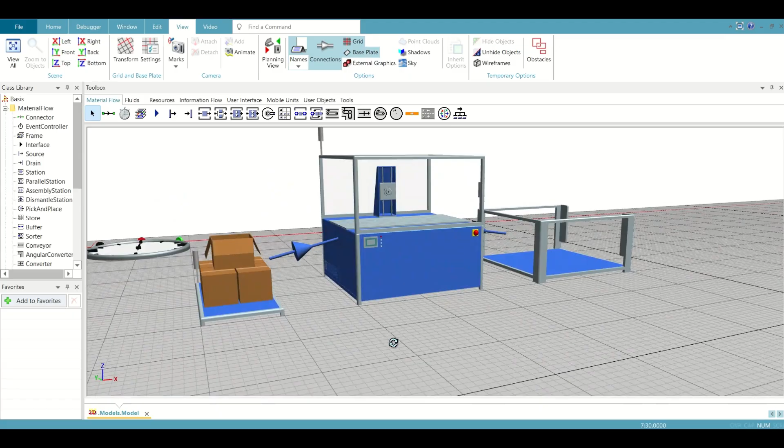And this is how our station, source, and buffer look in 3D. Now, if I just double click on this, you're going to get the properties window here. Let us keep this environment in 3D.

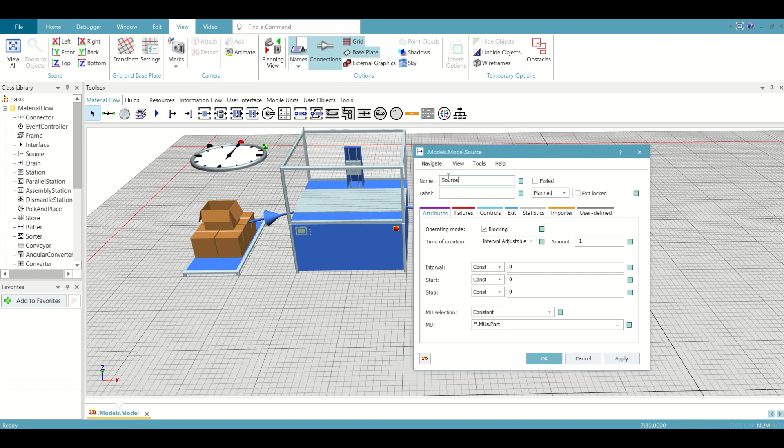Now let's look at the properties of the source. So just like here, we have the source which you can rename as per your requirement, and you are going to have all these details out here. We have a lot of variable parameters which you could feed into the source of this plant sim.

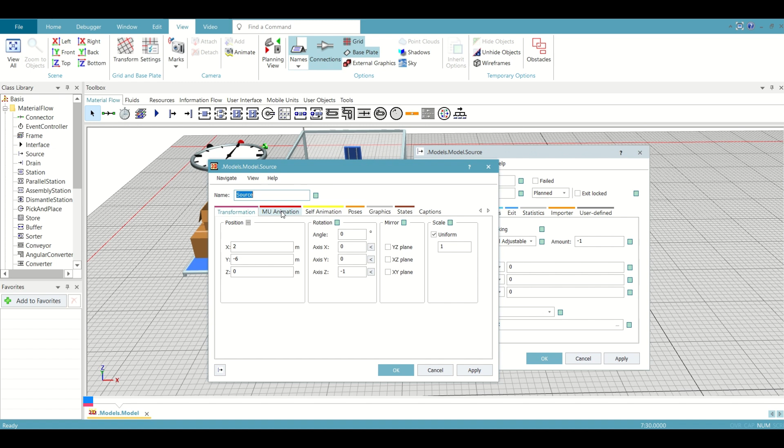Right now, if you click on this 3D, you are going to get the real 3D visualization related property window popping up, just like we had in Flexsim. In the single properties window of a source, you will be able to go into the visuals, generals, and stuff like that. Here you are going to have a separate property window for visuals where you can do transformations, MU animations, self animation, poses, graphics, states, and captions. So we'll look at all these in detail, guys, in all our tutorials coming ahead. We are going to have a long run together.

Now, when we look into the attributes, here you are going to have operating mode, time of creation which can be adjustable, delivery table, number of adjustables, triggers. Let us go with the interval adjustable. And what we're going to do is change the interval to, say, 10. Let us see what happens now.

And then we have a start time, we have a stop time also. You have an MU selection here, different selection criterias. Let us keep it constant, MUs.Part, okay? And what we are going to do, basically just like in Flexsim where we have a source where we put in the interval time, we are just going to put it in here.

Then we have failure modes here. We are not going to look at all these as of now, because that would be more detailed for us. We are just starting with basics, right? So let us just put in the timing for that, that is interval for the source, and then we can go ahead. But I will just take you through what are the different properties we have as of now.

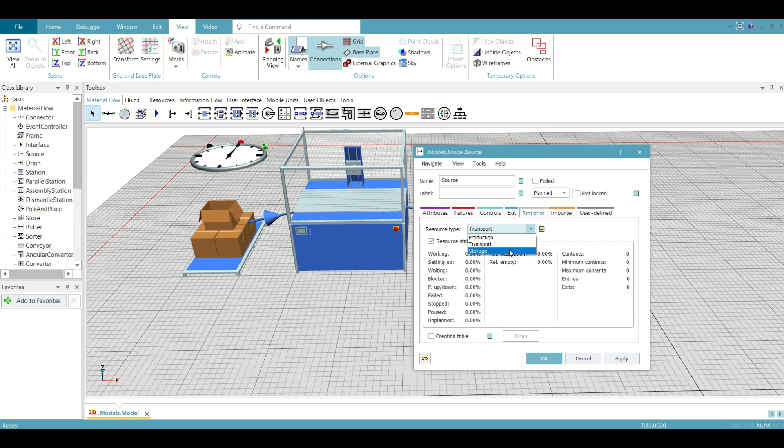Now let me make this okay. And what we're going to do now is open the station properties. By double clicking that, you are going to get this up, right? Here also you're going to have a processing time. Let us keep it what it was by default.

Just like in Flexsim, when you open it, you're going to have that 10 in the process time, right? That's what you also have in plant sim here, process time by default. Okay, you're going to keep it constant. You're going to have a lot of distributions here, guys, and we are going to learn all related to statistical distributions, because that is a must in simulation study.

Okay, and then if you look at it, we have a setup time, recovery time, then we also have a cycle time, which has a different tab here. And this is quite interesting, guys. In plant sim, you're going to have three times here: process time, setup time, recovery time. Whereas in Flexsim, you're going to have only two times, that is setup time and process time or cycle time, everything in the same thing.

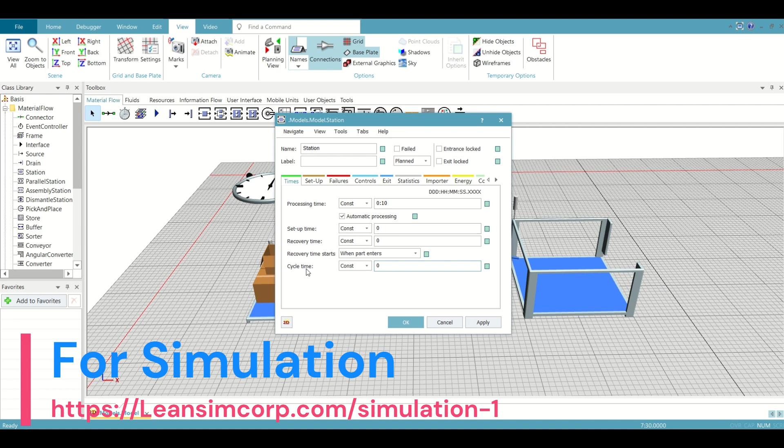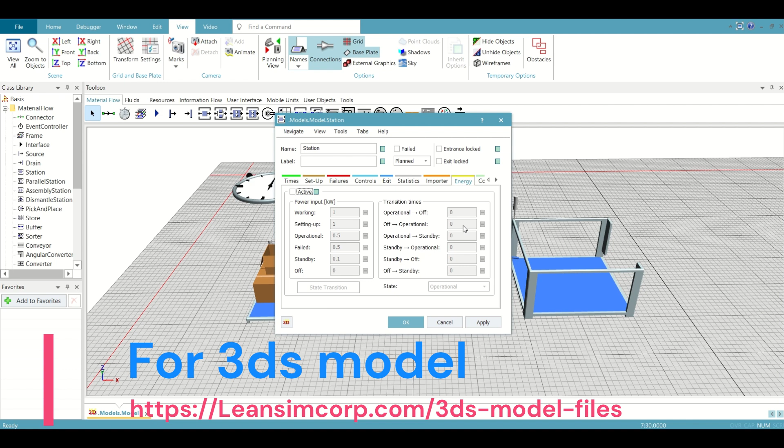You have a lot of distribution here, segregation, by the way. Then when we go to the setup, we have different types of strategies you can put in the setup. Failures, we have controls, exit, statistics, importer, you have an energy saving calculations, guys, in plant sim, and that is quite great stuff. For stations, we are going to feel very excited, and I am very much interested to use this feature and identify what things are going to be.

And then we go to the cost, right? And then we have a user defined thing. Let us see and explore what all these things mean, but let us stick to the basics as of now, and that is process time.

I have just put in the process time now. Let us go to the buffer. Here also we're going to keep the default buffer capacity.

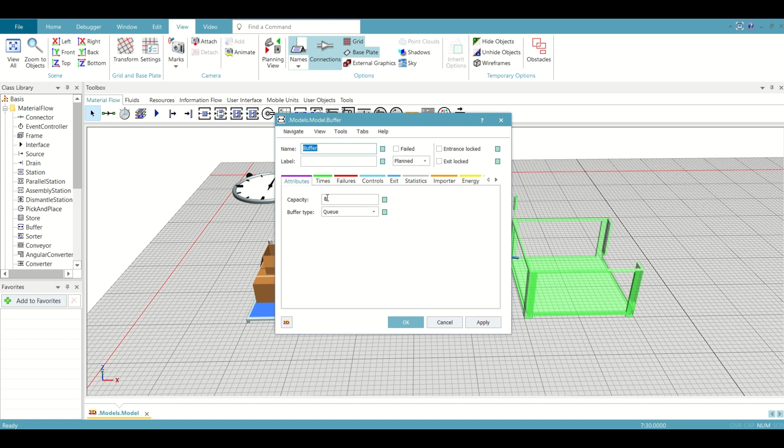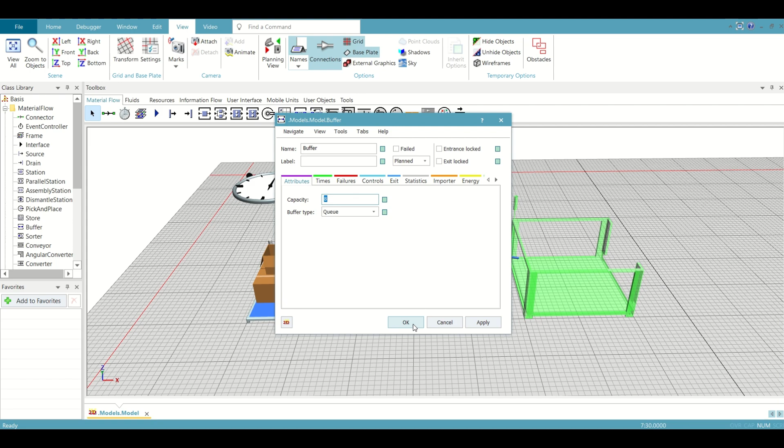Buffer related properties you can see here by double clicking this buffer. Here we have times, failures, controls, exit, statistics, importer, energy, and we have a cost associated here and the stuff. It is quite great because you get all the properties in the same particular attribute or object. So that is what I found great.

Now let us basically run this simulation model. We'll go in home, and in home you can see here event controllers, and when you play here you're going to get the different stuffs visualized. So just look at the part, guys. It's just like a die, you know.

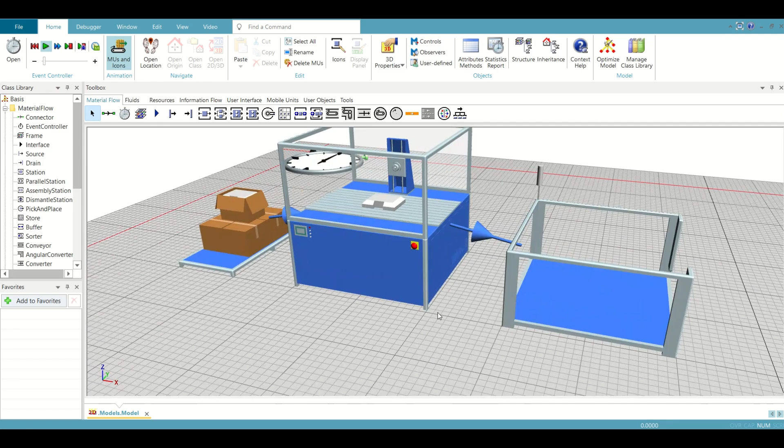This is a flow item which you had in Flexsim, a box which used to flow. Here you're going to have something just like a die. But in Flexsim the great thing is you can just move this out, you know. Yeah, here it's not possible to take it out. So this is what it is.

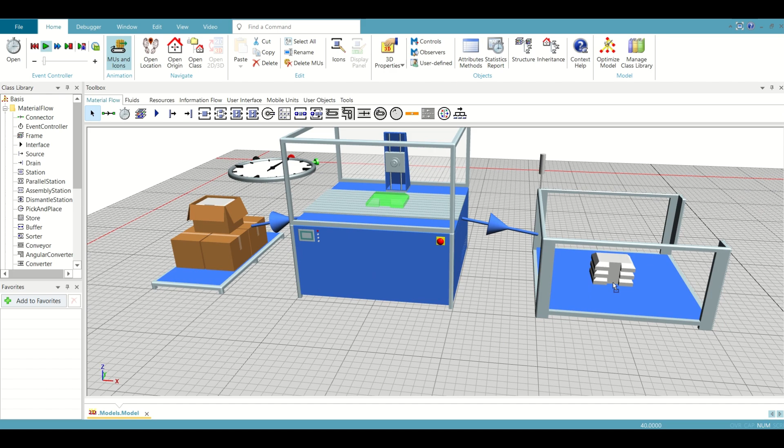This is how it looks, the 3D environment looks quite great, but not that great as it is in Flexsim, right? The 3D visualization, most probably it might be great. We can see ahead by putting or changing its graphics, but the initial one is quite simple.

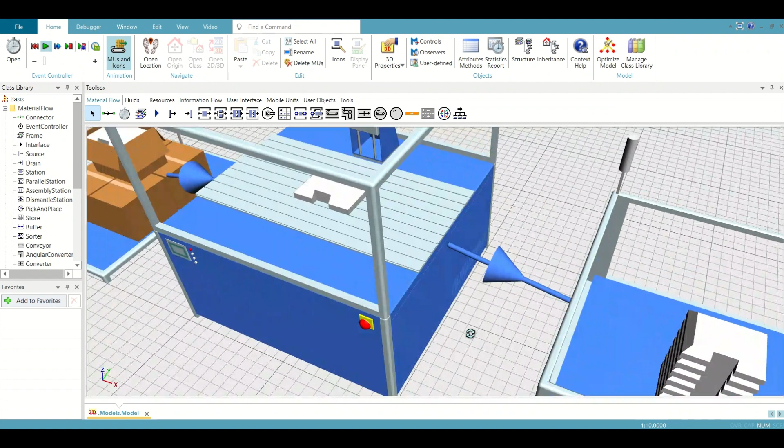Now, what do we have? We have all our parts processed. Now let us go and check the statistics in the statistics tab of the machine. So we have 100% working, okay? We have almost 11 entries, 10 exits, okay? This is how it is working.

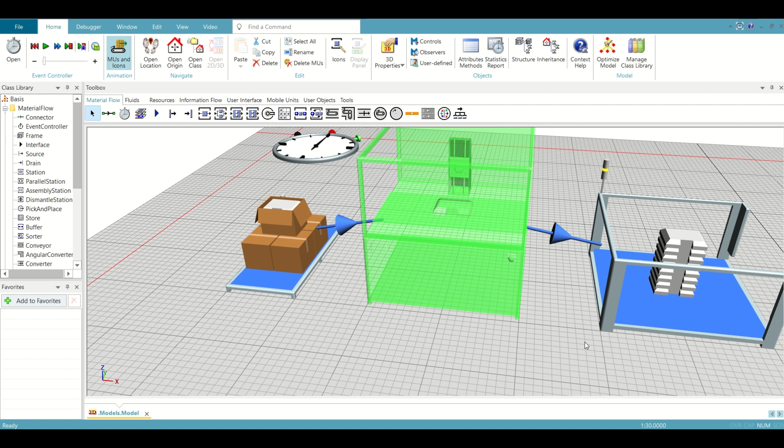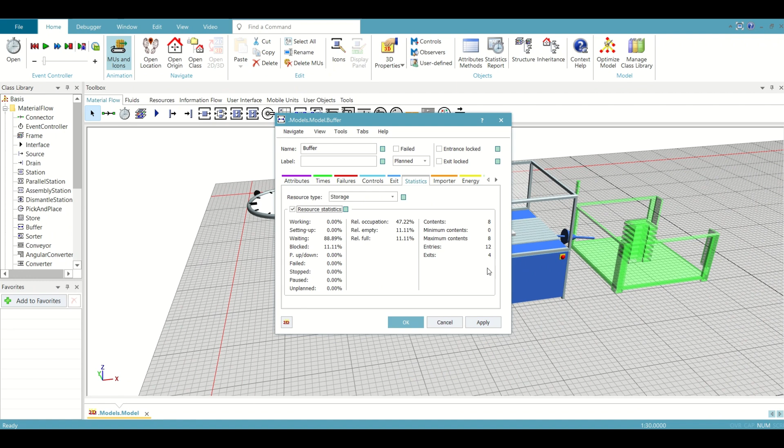And when I just look into the statistics of this, you're going to have 12 entries and 4 exits. Now where are these exits? We are going to look in the next video. But the current capacity needs to be, maximum content we have set it to 8, but we have 12 entries and 4 exits. Where are those 4 exits, guys? If I just take this out, is it an exit? Is it the exit? No. We're going to look into what the things are going to be.